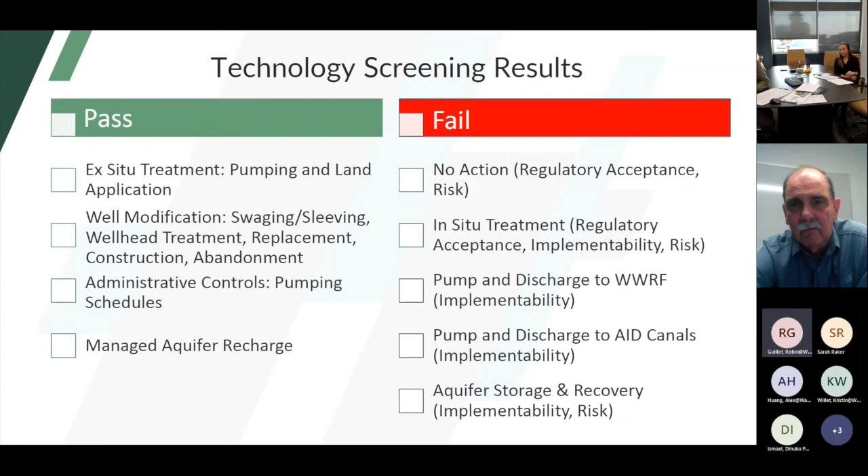it's quite a different matter. And so we looked at that and we thought, well, theoretically it's possible, but it would just be super high risk, and we just didn't see any way that either a regulatory agency or the public would ever want to undertake that. That makes sense. Okay, well, thank you for explaining. I just was curious. Sure, you bet.

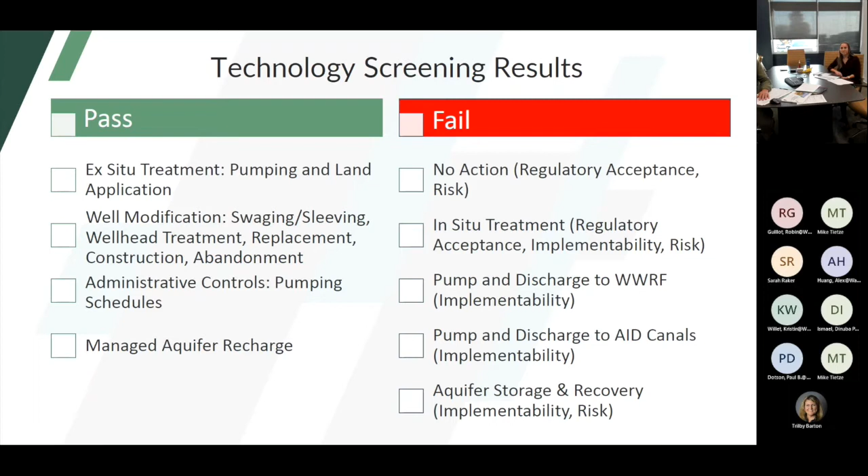Okay, so at this point, unless there's any more questions, I'll ask Kelly to describe the scenarios that we built around the technologies that pass the screening. All right, so in this section, I'm going to be going over the project alternatives that we built based on the technological approaches that Steve just discussed. We obviously only considered the 4 approaches that we considered passing.

So we were able to put together 6 scenarios. I'm just going to briefly touch on each of these scenarios on this slide, because I'm going to be going into depth into each project in the following slides. So in scenario 1, we had a GSP project, which utilized managed aquifer recharge.

And then in scenario 2, we were looking at removing DBCP and TCP from groundwater by maximizing pumping at well 14. So that included well modification as well as administrative controls. And then in scenario 3, we were looking at constructing a new well in place of the current RCR well, which also included well modifications and administrative controls.

And then in scenario 4, we were looking at shallow groundwater pumping where there was water with high nitrate, and then that water would be applied as irrigation water. So in that scenario, we also were using ex situ treatment as well as administrative controls. And then in scenario 5, we will be utilizing the current well 14 basins to recharge water from AID. So in that scenario, the technology used would be managed aquifer recharge.

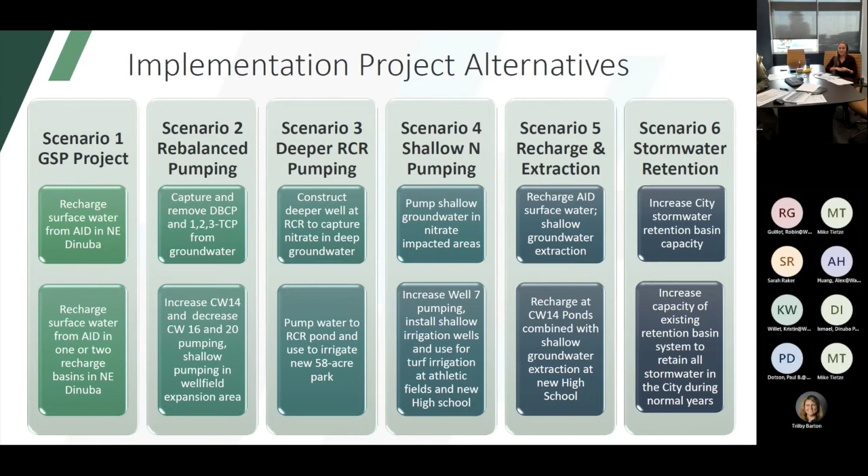And then in scenario 6, we looked at increasing the current stormwater retention basin capacity based on the AECOM tech memo that was put together. And that scenario has a little bit of aquifer recharge involved as well. All right, so before I go into each of these projects in detail, I just want to clear up some of the verbiage that we'll be using.

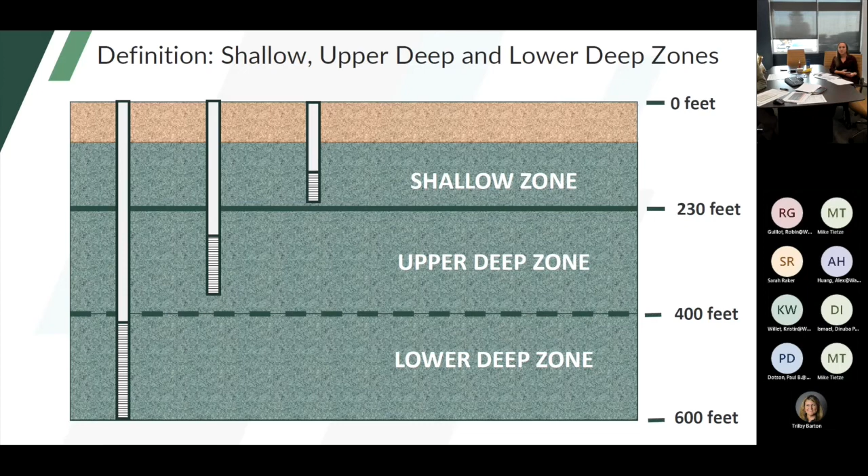So we refer to the groundwater in terms of the shallow zone, the upper deep zone, and the lower deep zone. So as you can see in this graphic here, the shallow zone is the upper 230 feet, then the upper deep is from 230 feet deep to 400 feet deep, and the lower deep would be anything beyond 400 feet. All right, so our first project that we put together, we refer to all of these projects as scenarios.

So scenario 1 is the GSP project, which was outlined in the Groundwater Sustainability Plan that was adopted in 2019 by the Kings River East GSA. In that Groundwater Sustainability Plan, they called for recharge in the northeast section of town.

There wasn't a specific area, so we found an area that we thought was most appropriate within the city limits, and we identified 60 acres of current farmland. The basins in that 60 acres would be infiltrating water from the Smithtown ditch, which you can barely see on this figure, but it's in the very upper right corner of the figure.

So one issue here is that this isn't land that the city owns. It would have to be acquired. But all of the numbers that we have here are coming from the GSP in that proposed project. All right, if there's any questions on any of these scenarios, feel free to ask them now before we move on to the next one.

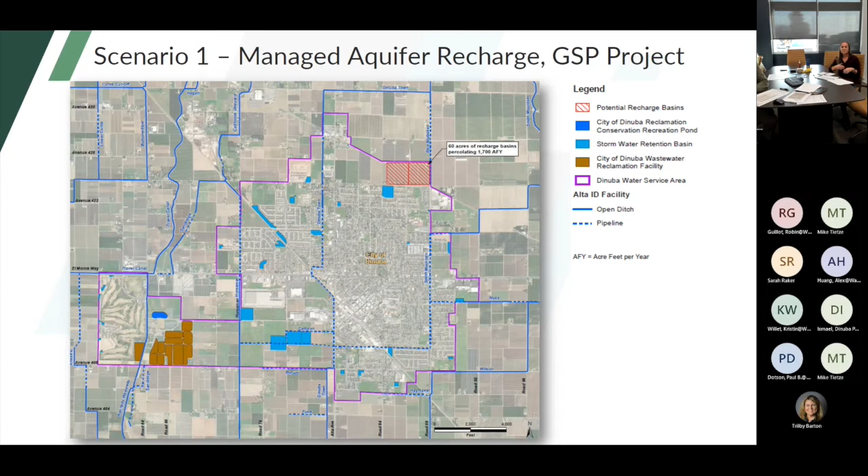All right, so I'll go into scenario 2, which is administrative controls for 1,2,3-TCP mitigation. Currently, well 14 has GAC treatment for the TCP in that area. So we've proposed in this scenario to maximize pumping since there's already treatment in place at that well. We would be increasing the pumping from 597 million gallons per year up to 735 million gallons per year.

By increasing the pumping at well 14, we would be decreasing the pumping at the surrounding wells, and the two wells closest to well 14 are shown here, well 16 and well 20. The volumes those wells produce each year would be reduced since well 14 would be producing more. This would help draw out that TCP-laden water in that area and hopefully prevent it from spreading to other areas and contaminating other wells.

Also, as part of this scenario, well 21 is a well that the city will be installing in the future. They're currently in the works for putting it in. And there has been some TCP in that northwest section, north of the city there. So there is the potential that they could encounter TCP at that well. So in this scenario, we've proposed installing, oh, sorry, could you go back?

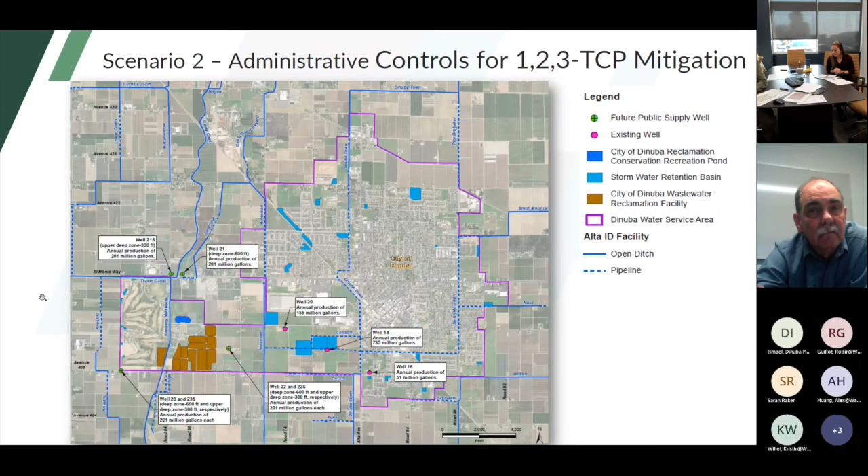Scenario 3. So in scenario 3, we are looking at the RCR well, which is currently located near the golf course and near the wastewater reclamation plant.

Currently the wastewater reclamation plant is infiltrating all of its treated water. So there's a large volume of clean water or treated water that's being infiltrated, and that water is very low in nitrates, like Steve said, due to the anoxic bacteria in the plant. But that large volume of water is pushing the higher nitrate laden water down to lower depths. Typically the water with high nitrate is shallow, but with the large volume of water, we're seeing that high nitrate water be pushed down into the deeper zones.

So the RCR well was initially installed to draw nitrate laden water to be used as irrigation for the golf course. However, that well is currently producing clean water that doesn't have any nitrates because it's capturing water from the infiltration at the wastewater reclamation plant. So in this project, we've proposed abandoning the current RCR well and installing a new deep zone well where the current RCR well is, and that well would serve as irrigation for the golf course like the current RCR well is now, in addition to a 58-acre park that's going to be installed there near the golf course.

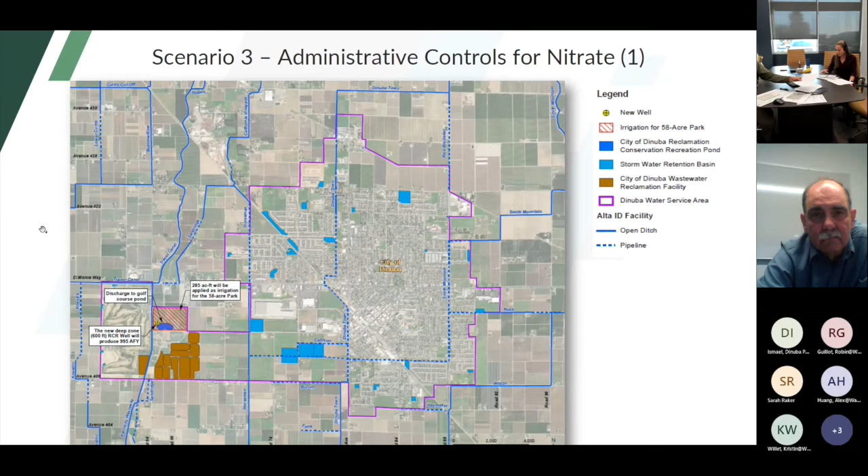So in scenario 4, we identified 4 different areas where there is the opportunity to irrigate turf. So this included parks and schools and also the future proposed high school. So in this scenario, we would be installing shallow groundwater wells at each of those parks. So this would remove water in the shallow zone that has high nitrates, and then it would be applied to the lawns and turf fields for irrigation, which would again allow the turf to uptake the nitrates and infiltrate the clean water back into the groundwater.

However, the volumes of water that are needed to irrigate these parks and fields that we identified is quite low. So that was something that we saw impact the outcome later on. Are there any questions here? All right, so I'll move on to scenario 5.

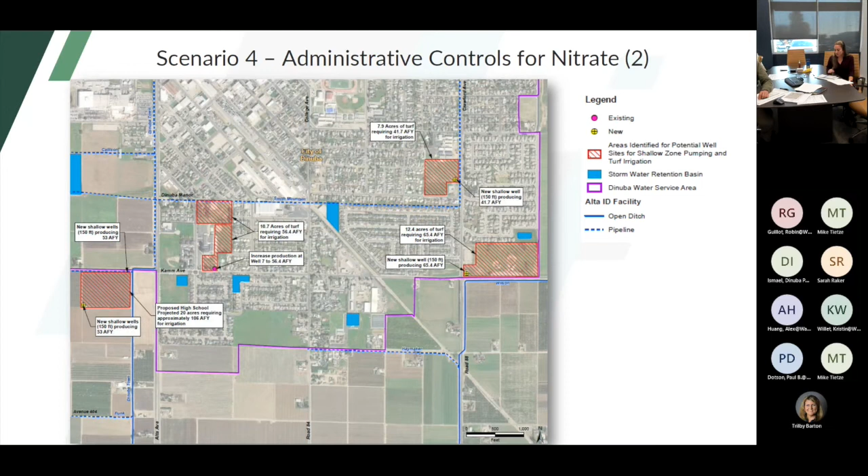So in scenario 5, we would be utilizing the current basins at well 14. There's 3 basins, and they have a total acreage of 30 acres. And we're also proposing adding a new 10-acre basin on city land right there, just north and northwest of the current basins. So in this scenario, we would be getting water from AID from the Dinuba town ditch. And this water would be supplied in years with above average rainfall. And then that water would be infiltrated at these 4 basins.

In addition to infiltration at these basins, we would also be installing 2 400-foot deep wells for future development. And each of those 2 wells there to the south would be producing 400 acre feet a year. And that's for the city's future expansion plans. So the basins and the water that they would be getting from AID would not be consistent every year. It would depend on years where there is storm water available.

Let me just add, Kelly, a couple of things. One is that we'd also be collecting stormwater runoff from the city's stormwater system in those basins. And that's estimated to be 340 acre feet per year on average, but it would happen every year to some extent, whereas the AID deliveries on average would only happen once every 4.5 years.

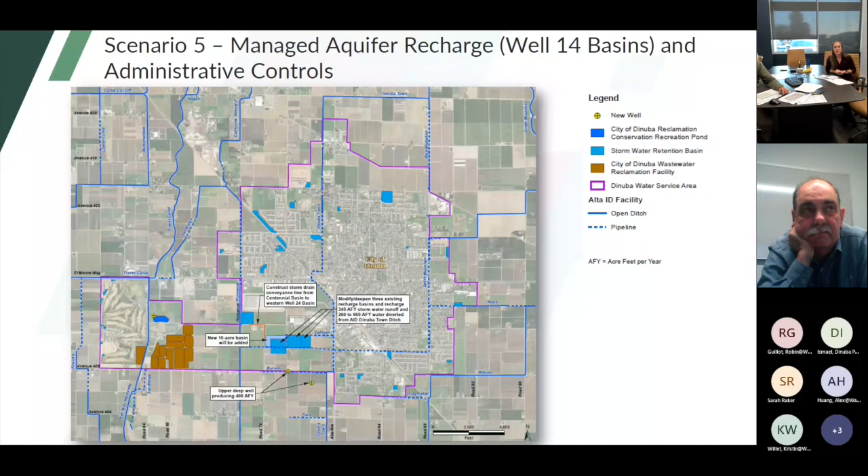All right, so in scenario 6, we looked at the AECOM technical memo, which outlined the drainage basin capacity analysis for the city of Dinuba. And this went through all of the city's drainage basins and identified which ones had the capacity for expansion. So we identified 8 basins that we would be interested in expanding, and with the expansion of those 8 basins, we would add an additional 457 acre feet of storage capacity.

And right now, the city currently pumps water from their stormwater retention basins out into AID and other drainage facilities. So that water isn't able to be infiltrated or stored at all because there isn't currently capacity for it when there are storm events.

So by expanding it, we would be able to reserve that water instead of sending it out of the city, and also use it for infiltration. However, we don't have any data on how much water the city is currently pumping out of these basins, and there's so little data on the amount of water that's currently going into each of these basins that we felt like it wasn't appropriate to continue with this project because of the lack of information.

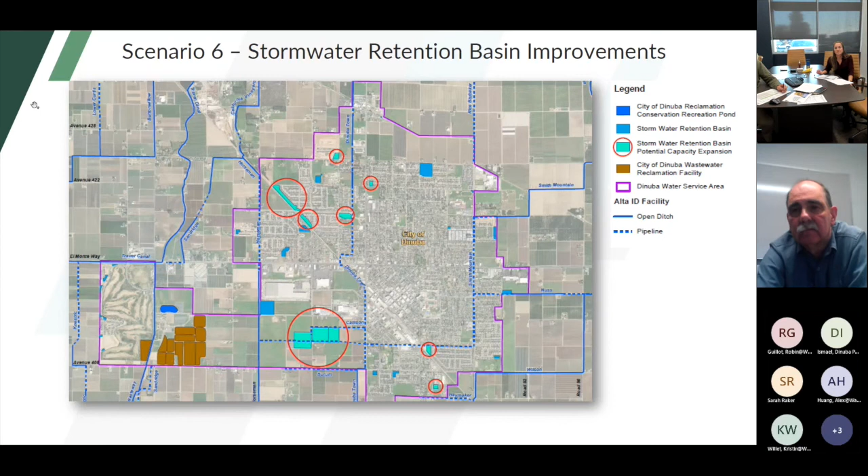All right, and if there's no questions, then I'll hand it over to Steve. Great, thanks.

Okay, so now I'll just cover the ranking of the scenarios. As Kelly said, we're only ranking the first 5. Scenario 6 was excluded because it's just impossible to know what benefit it may have. So the feasibility evaluation criteria and scoring are these 5 categories that we used. For various reasons, they were weighted. Some of them were weighted more heavily. Effectiveness, of course, and cost and risk and uncertainty are given a higher weighting than the last 2.

And the scoring was done on a comparative basis, so a qualitative basis. Each scenario was ranked 1 through 5, 5 being the best and 1 being the worst, in each of these 5 categories. And then the weighting factor was applied, and then the scoring came out at the end. So if you can go to the next slide.

So there's a lot of numbers here, so we're not going to get into it too deep, but basically, once we established the scenarios, the groundwater model was used to estimate the effectiveness of each of the scenarios, and that was derived by how much water was either prevented from exceeding the MCL or lowered below the MCL. As you can see, the most effective scenarios, just based on order of magnitude, were the two managed aquifer recharge projects, 1 and 5.

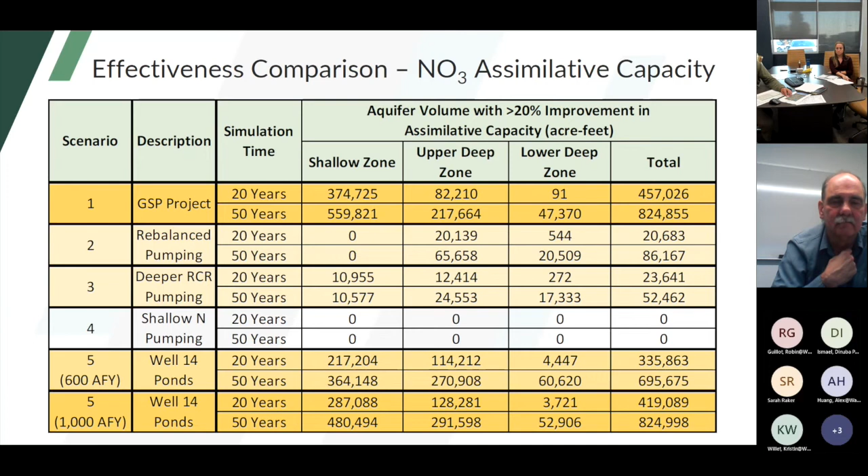Thanks, Mike. Yeah, and if there's any questions about the model or model results, then Mike will be your man in answering that, because we're just taking the results and looking at them from the entire package here. The next slide shows some of the model output. So from the numbers we go to a little bit more graphical, maybe a little bit easier to understand. So scenario 1, these are basically the shallow zone and the upper deep zone changes to nitrate concentrations over 20 and 50 years.

And as you can see, the improved water flows basically in the traditional or the typical gradient beneath the city, which is to the southwest, and moves through the city, drawn also by the pumping of existing wells, and shows a pretty significant improvement in the shallow zone where the water is infiltrating, and then in the upper deep zone, not much. There's no figures here for the lower deep zone because the water doesn't have much of a registered impact in the model at that depth, which is understandable considering we're recharging from the surface.

I'll note we do have model results, but we don't have figures here for TCP and DBCP. Those constituents of concern are just, there's so little above the MCL beneath the city, and not enough data to really demonstrate whether the scenarios are greatly impacting the water quality based on TCP concentrations. So I'm sure if you like, Mike and his team can give you the model outputs that we saw there, but there just isn't enough data, not much widespread contaminant to look at. So we're basically focusing strictly on nitrates here.

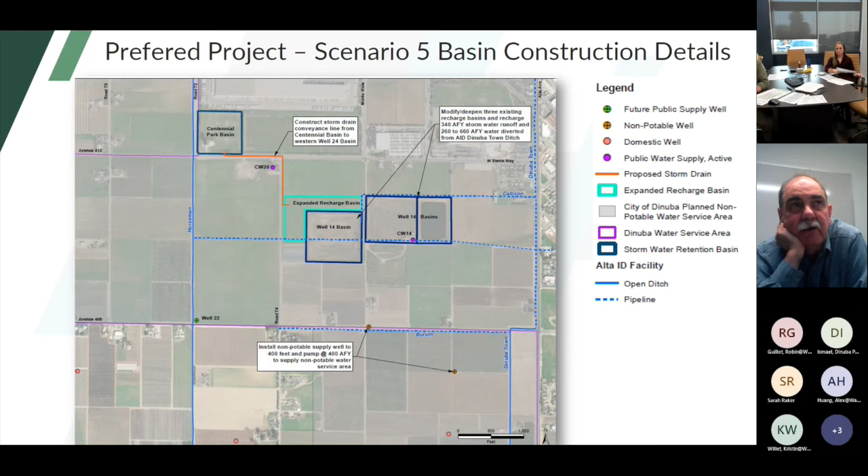Well, I'm curious whether or not you've essentially gone through a scenario using the groundwater model where both of these scenarios were implemented at the same time. What would that end up looking like 20 and 50 years down the line? Mike, I don't know if we ran that scenario because they're pretty separate. You mean scenario 3 and scenario 5? Yeah. No, we did run the RCR well together with scenario 5 with the well 14 ponds, and in fact, if you go back to the plume map, you'll see some improvement.

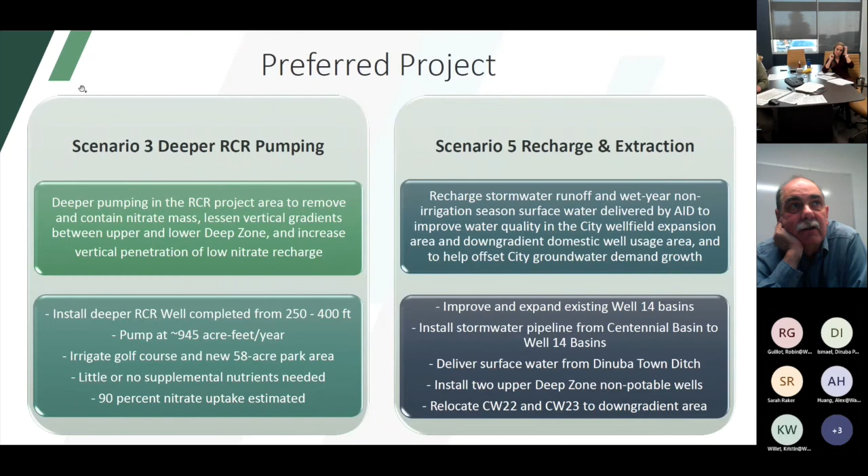So keep going up a little bit more, Trilby. There, one more. Oh, one back down. Okay, one down. For scenario 3 or scenario? No, go to scenario 5. Scenario 5, yeah, the next one.

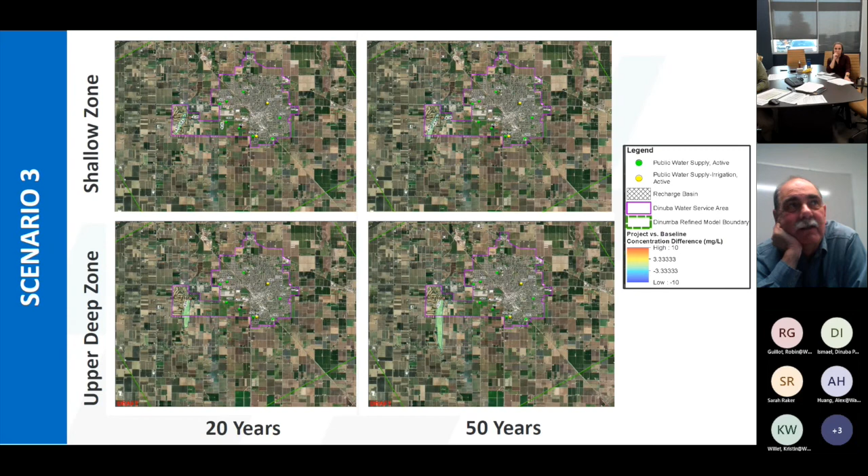So you'll see a little cleanup plume coming down gradient from the RCR well there. The RCR well is actually turned on and deepened in that particular run. Oh, I see. So these figures capture both of those. Exactly. And it does look like, especially after 50 years in the upper deep zone, the combination of the two projects together makes a bigger difference than just the well 14 ponds by themselves. All right, good. I'd forgotten that we had that in there, Mike. Thanks for pointing that out.

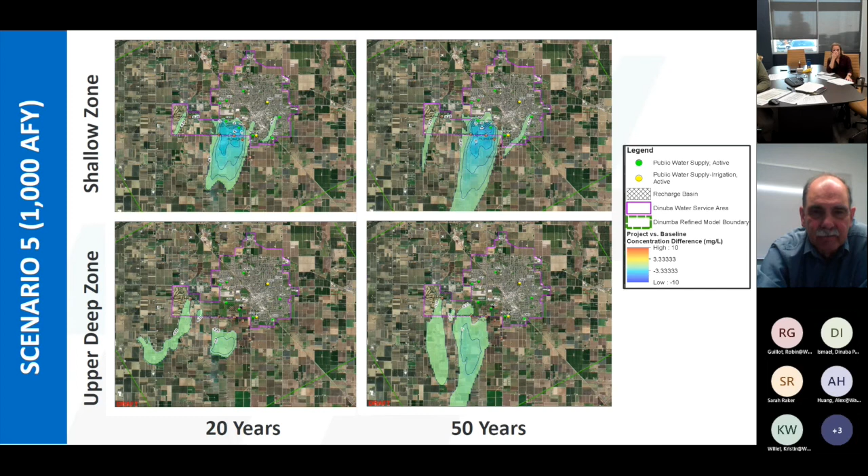So if we go back to the preferred project design assumptions. There we go. So we've identified 5A and 5B. Basically, it's bracketing the amount of water we think we could not only receive from AID but also infiltrate in the available number of days. If the water comes down the mountain in a limited time frame, we have to be able to get it in the ground when it's available, since it's not stored anywhere.

So you can see the number of days and the infiltration rate that's being assumed. The half a foot per day infiltration rate on one hand, and then 1 foot per day infiltration rate. We think we can achieve somewhere between those two with proper maintenance on the ponds on a regular basis. And that would mean probably an annual maintenance to make sure we are ready for when the storm events do come, because when they do come, we'll need to take as much water as we can get.

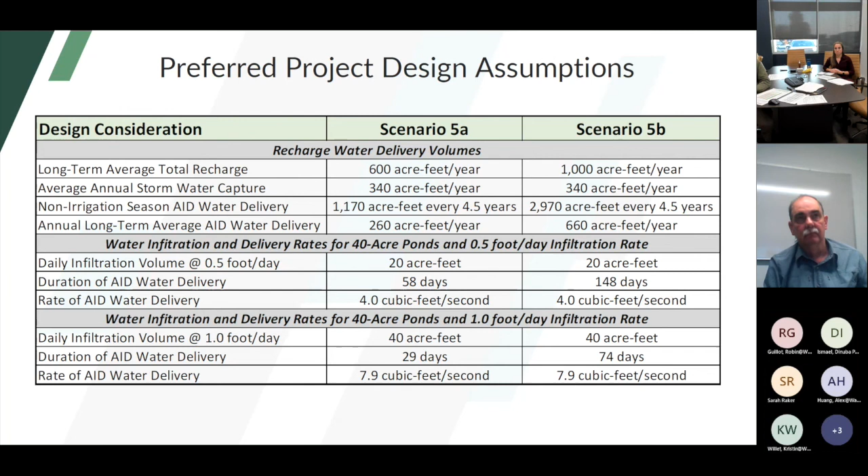The AID water delivery flows are more for AID's benefit, to let them know, because we may also be limited by how much carry capacity is in the canals. A lot of these details we've discussed with AID, but there's probably more details to work out. It just gives you a general idea of the scale, the magnitude that would be required to deliver that water.

So here we have the cost estimate. Yeah, go ahead and go to the next slide. It's fine. The last slide for me here is the preferred project cost estimate in today's dollars. We've got the earthwork at the various basins, including the new basin expansion. And again, based on the assumptions that we can dispose of the soil there on city property right adjacent to the existing basins.

The new wells, that would include the RCR well, so there's 3 wells. And we've separated out the well itself from the well site construction, because they tend to be built by different contractors, so it's easier for us to think about it that way. And the overall project in total is, with the contingency built in, based on this level of estimate, about $6.3 million.

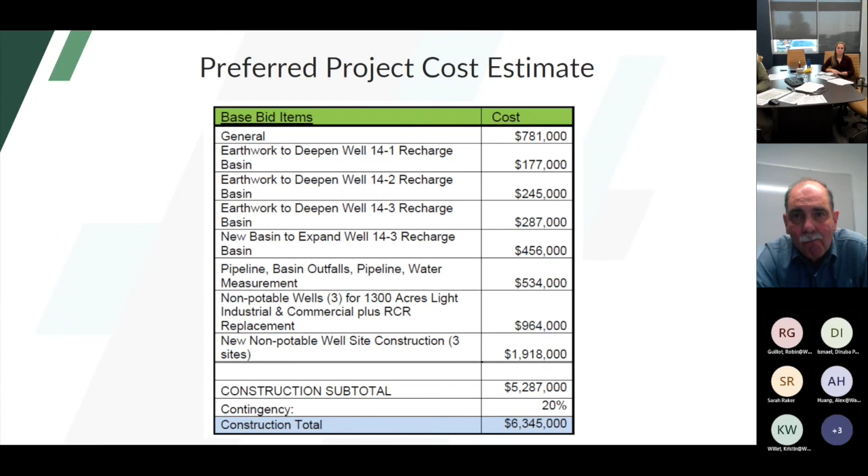So I think that's it for us. And if there's any questions, be happy to address them. I think this is Sarah. I'll open up to Ismael if you wanted to make any comments on this project.

The only comments I have is that I didn't hear it mentioned, well, actually Steve did briefly, the basins around well 14, when we built those, they were supposed to be for groundwater recharge, but because they're not deep enough, really, it's just a temporary holding basin, and then we have to move the water back down into the AID's canals and down the road. So

just deepening those, even if we remain in a drought for the next 10 years and don't get a whole lot of stormwater from upstream, the water that we get in our downtown, we just installed a 60-inch line, that's how much stormwater we get in our downtown, going all the way down there. So just by deepening the basins, we at least capture that stormwater, and it's an enormous amount. We used to flood all around our high school.

So yeah, that project captures a lot more water than just what AID is bringing from upstream. And other than that, this project has been going on for a while, a lot of work, a lot of data, a lot of meetings, a lot of discussions, and very happy with the way it's turned out. So, want to thank Mike and Sarah and Steve and his team and Trilby and everybody else involved, and also, of course, Robin and Paul and those of you at the state that are helping us out with this. Just excited to see it wrapping up and have some projects to implement now.